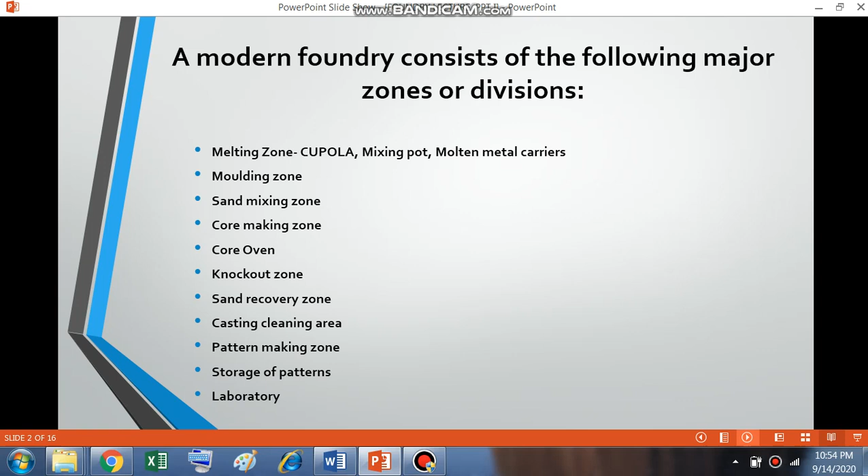Patterns. Patterns are replica or model of the object to be cast. Except for various allowances, cores and core prints, a pattern exactly resembles the object. Difference between a pattern and an object: pattern carries various allowances like shrinkage allowance, machining allowance, draft allowance, etc. Patterns are of different material than the casting, for example, wood, aluminium. Patterns carry additional portions like core prints, etc. Pattern may be in 2-3 pieces, but casting is one. Patterns can also be made out of plastic, wax, and plaster of Paris.

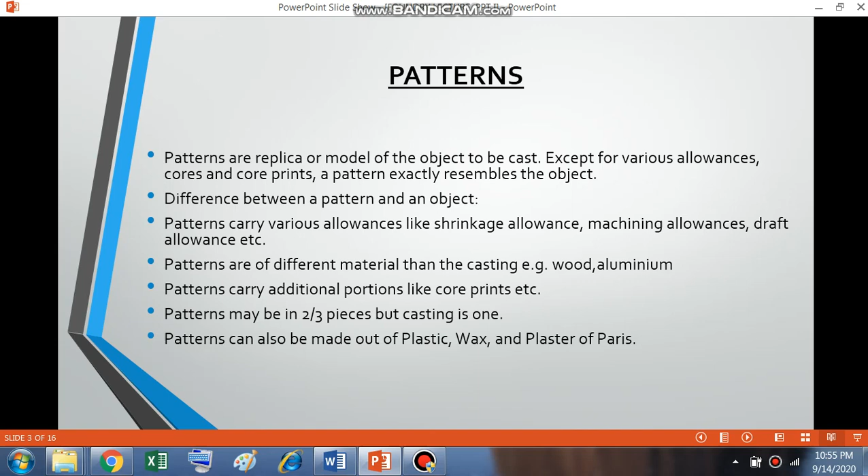Wood as a pattern material. Wood has been the most popular pattern material, and more than 90% of the casting is done with the help of wooden pattern. This is because the advantages of wood as a pattern material are many. It is readily available and cheap. It can be easily shaped and machined. As it is light, handling is easy. It can be joined easily by gluing, nailing, and intricate shapes can be made easily. Good surface finish is obtained. It can be preserved for a long time by applying protective coating.

Now, what are the disadvantages of wood as a pattern material? The biggest disadvantage is it absorbs moisture easily and shape gets deformed. It wears out due to abrasion with molding sand. It needs preservation for storing. It needs dry place for storing. Not suitable for use in large number of casting impressions. Life is short compared to the number of casting impressions. Now the types of wood used in pattern making are teak, shisham, kail, deodar, sal, walnut, mahogany, and pine.

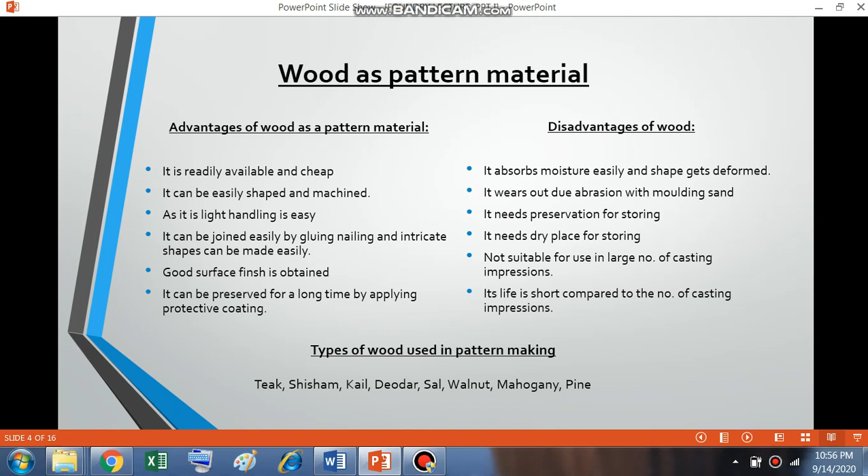Metal pattern. Wood has been used in most of the casting, but there is a requirement of metal pattern also in certain cases. The metal patterns are made of aluminium, cast iron, steel, brass, or white metal. Now what are the advantages of a metal pattern? It does not deform in storage like wood, which deforms by absorbing moisture. Its dimension does not change in moist condition and in contact with sand. If the wooden pattern is used to make more impressions in sand, the wooden pattern loses dimension. It gives good surface finish. It is suitable for accurate dimensioning. It has good durability and strength.

Now, disadvantages of metal patterns are it requires a lot of machining to achieve the finish and shape, which is very easy in case of a wooden pattern. As metals are costlier than wood, these are unsuitable for less number of castings. Some metal gets rusted and may contaminate the casting, resulting in defective casting. Metal patterns are heavier than wood.

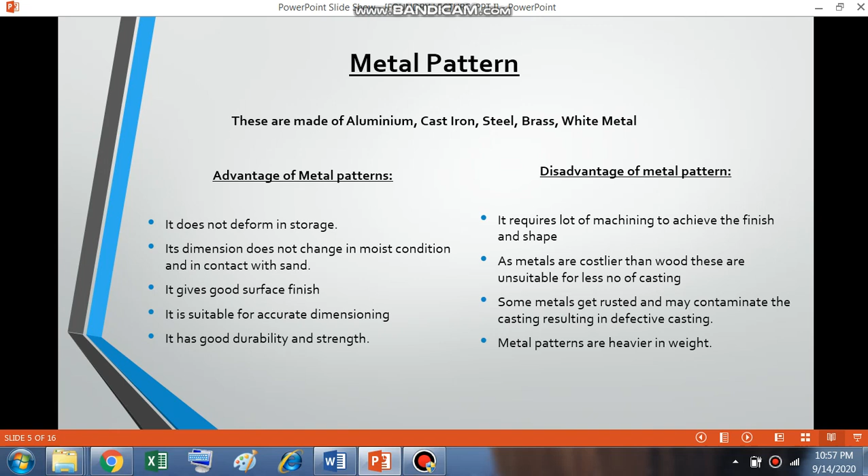Selection of pattern material depends on the following factors: number of castings to be produced, method of molding, hand or machine, method of casting, for example, for investment casting, wax pattern is used, dimensional accuracy of the component, design and shape of the component.

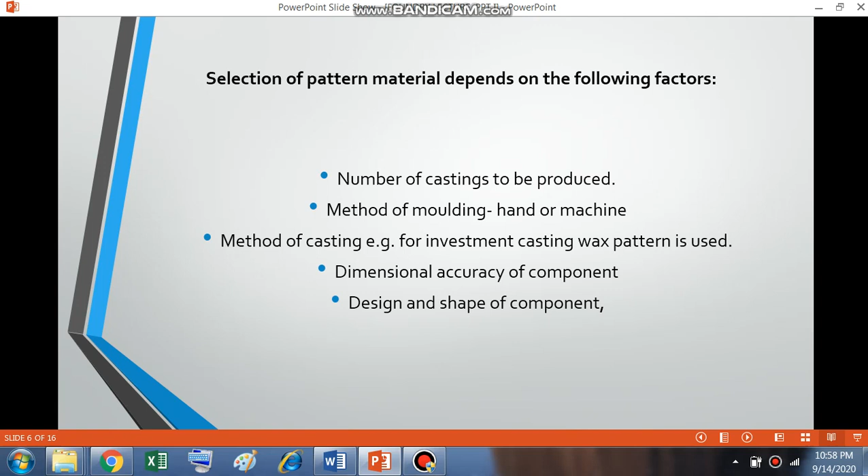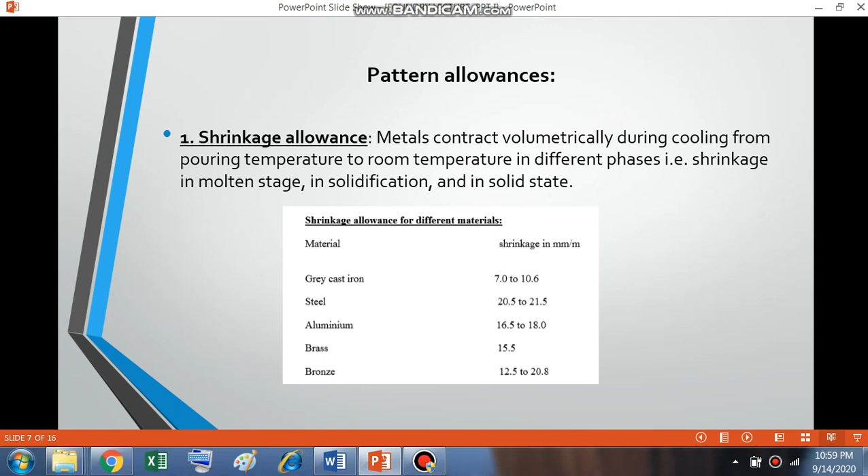Pattern allowances. The most important pattern allowance is the shrinkage allowance. Metals contract volumetrically during cooling from pouring temperature to room temperature in different phases, that is shrinkage in molten stage, in solidification and in solid state. The shrinkage allowances in different materials are mentioned. For example, for grey cast iron, the shrinkage is 7 to 10 millimeter per meter. Steel, it is 20 to 21 millimeter per meter. Aluminium, 16.5 to 18 millimeter per meter. Brass is about 16 millimeter per meter. Bronze is 12 to 20 millimeter per meter. That means in 1 meter length, this will be the shrinkage for the different materials mentioned.

Pattern maker scale. A special scale is available with the marking done with shrinkage allowance incorporated in the marked dimensions. Both sides of the scale are marked for 4 metals, 2 on each side.

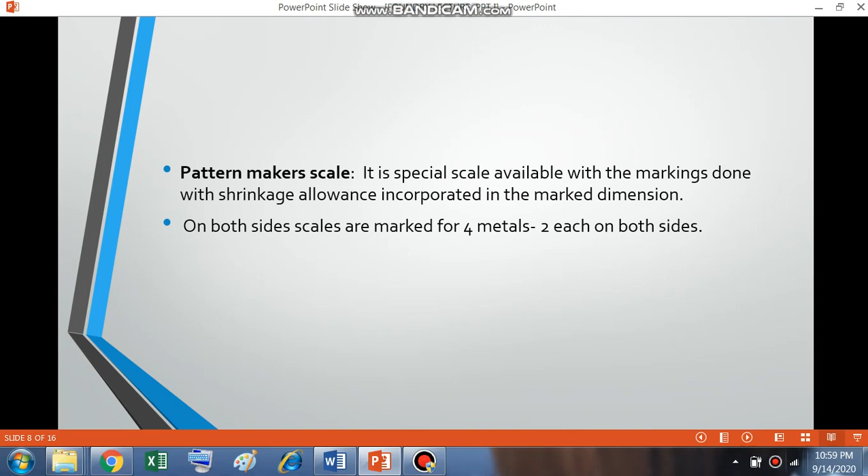This is the problem of arriving at the dimension of the pattern. Grey cast iron items are to be produced from aluminium patterns. If one dimension of aluminium pattern is 80 millimeter, calculate the correct dimension on the wooden pattern from which the aluminium pattern is to be made. Now, to make an aluminium pattern or a metal pattern, one has to make a wooden pattern. So if you make a wooden pattern first, then aluminium pattern and then the material, the shrinkage for aluminium and shrinkage for the grey iron casting are to be added to the dimension of the object.

So in this case, the aluminium pattern will have an allowance of 1.36 millimeter, because 17 millimeter is the shrinkage in case of aluminium per 1000 millimeter. Similarly, allowance for grey iron casting is 10 millimeter per meter, so 10 by 1000 into 80 is 0.8 millimeter. So total dimension of the wooden pattern corresponding to 80 millimeter would be 80 plus 1.36 plus 0.8, which is 82.2 millimeter.

Two other allowances on pattern. Machining allowance is normally kept 3 millimeter overall, but depends on complexity of the casting. Draft or taper allowance: all vertical surfaces on patterns are provided with this allowance for easy withdrawal of the pattern from sand. Shake or rap allowance: after molding, the pattern is shaken by striking with a wooden piece from side to side for removal. It enlarges the cavity, so negative pattern allowances are provided.

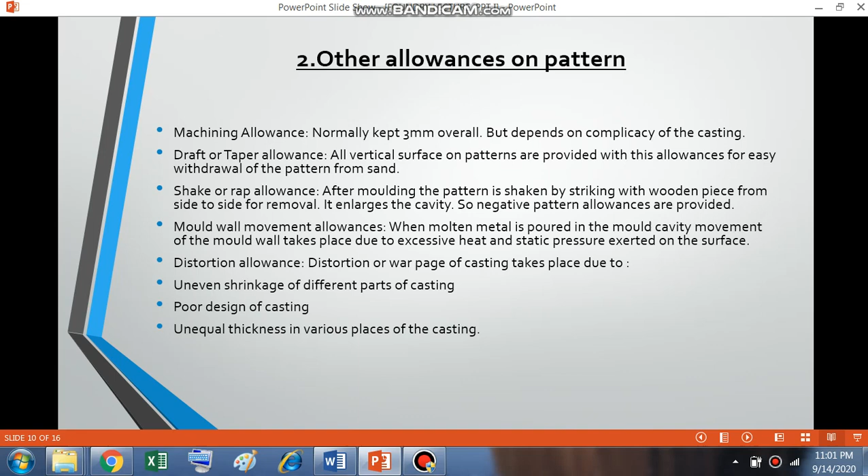Mold wall movement allowance. When molten metal is poured in the mold cavity, movement of the mold walls takes place due to excessive heat and static pressure exerted on the surface. Distortion allowance. Distortion or warpage of casting takes place due to uneven shrinkage in the different parts of the casting, poor design of the casting, and unequal thickness in various places of the casting.

Types of patterns. Patterns are of different types. Single piece pattern, which is very rare. Two piece or cope and drag pattern, that is the most used in foundry. Multiple piece pattern, sometimes patterns have to be made in multiple pieces. Match plate pattern...